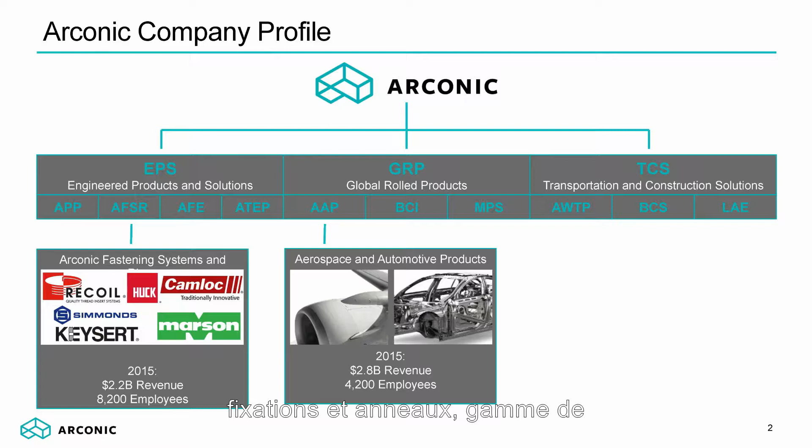So sheet metal, fasteners, and engineered solutions. The two groups that will probably interest this group the most are Arconic fastening systems and rings, and rolled products. Fastening systems and rings offers a full series of structural blind fasteners, lock bolts, threaded inserts, and similar products. Our rolled products group, which I'll introduce today, supplies sheet metal to automotive customers as well as aerospace customers.

As far as automotive is concerned, our automotive support and presence includes sales, manufacturing, and support locations all around the globe. I'm from our North American group, and I sit at a desk in Waco, Texas, at one of our manufacturing plants. We also have a large technical development facility in Pittsburgh, Pennsylvania, where some of this technology was developed, as well as a location here in Telford locally.

The technology I'm going to introduce is really best described as a hybrid of welding and mechanical fastening. It was developed through collaboration between our technical center in Pittsburgh, which has a lot of mixed material welding, joining, and aluminum development experience, and my group headquartered in Waco, Texas, which has a lot of experience in mechanical fastening and joining. So this new technology brings together the best of both schools of thought.

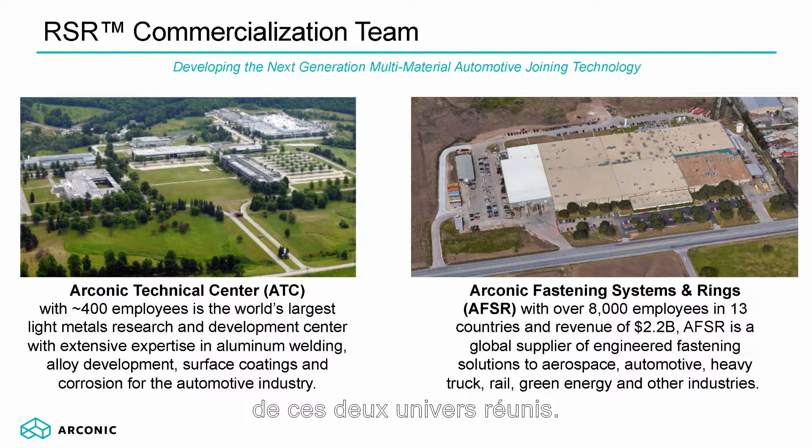The mixed material approach would be more like what you're seeing in the Cadillac CT6, where you're very selective about using high-strength steel, maybe in your safety cage, but more comfortable going with aluminum in your closures and outer panels. We feel our technology is well situated to help you along either of those paths you choose to take.

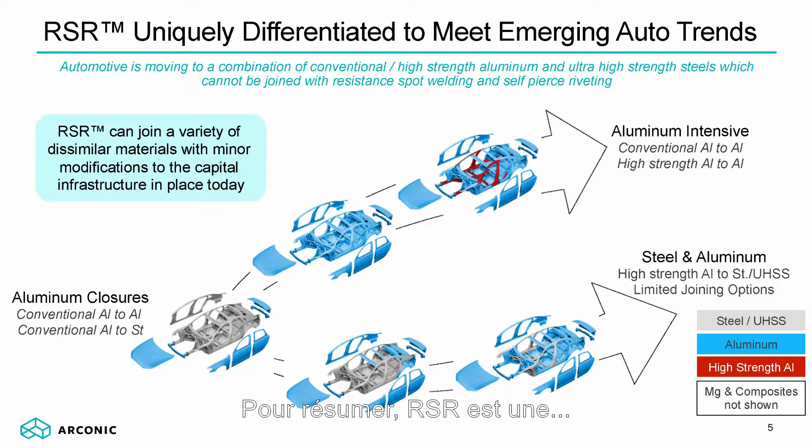So with this technology, you're not actually welding the top sheet to the bottom sheet. You're welding the fastener to the bottom sheet and capturing the top sheet, but you still get a nice rigid joint. That allows you to join a large variety of materials as your top sheet.

Obviously your bottom sheet needs to be metallic, so either steel or aluminum, and you choose the fastener to match that bottom sheet. But then you can join either metallic or non-metallic sheets to that bottom sheet—painted or unpainted steel or aluminum, plastic, just about anything you can imagine. The large majority of our development so far has been mixed material, aluminum to steel, and the reverse.

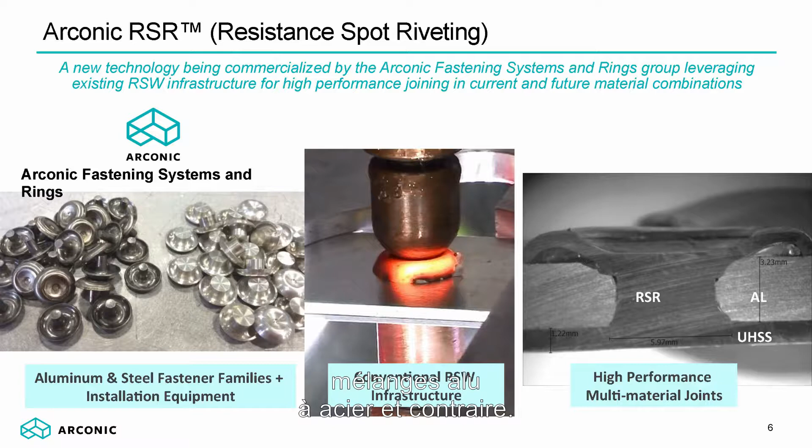I've got a couple of videos, since words only go so far to describe what you're seeing with this process.

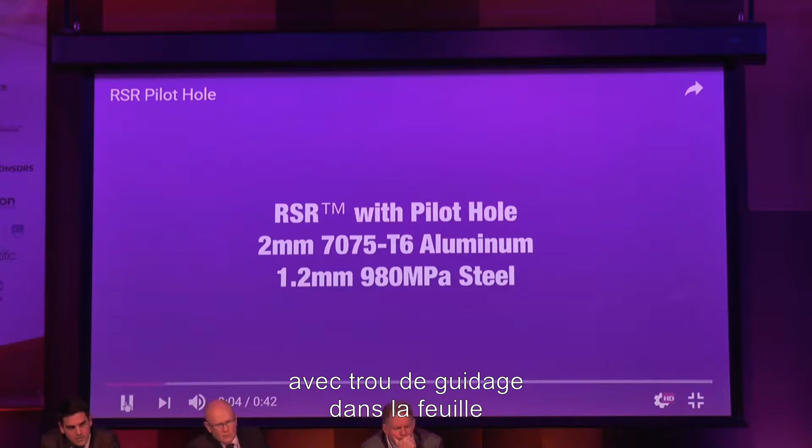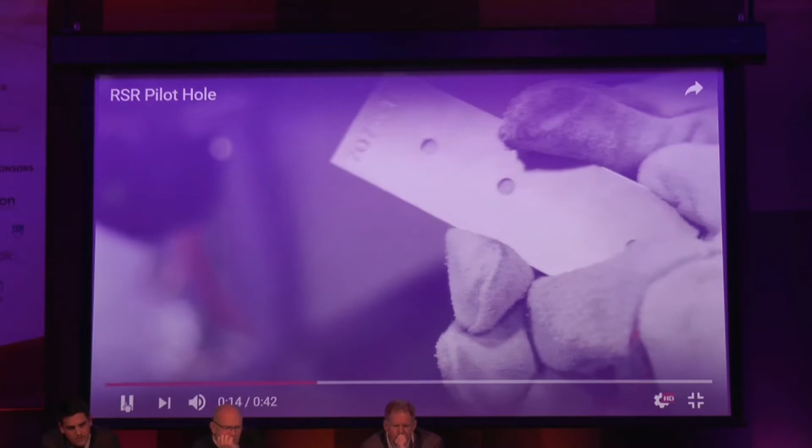There are two ways that this works. This is the first, where you have a pilot hole in the top sheet and the rivet passes through it. So in this case, that's the pre-prepared top sheet, those are the fasteners themselves, and there's our feed system with a top hole. That's all the time the process takes—it's very comparable in cycle time to your weld cell.

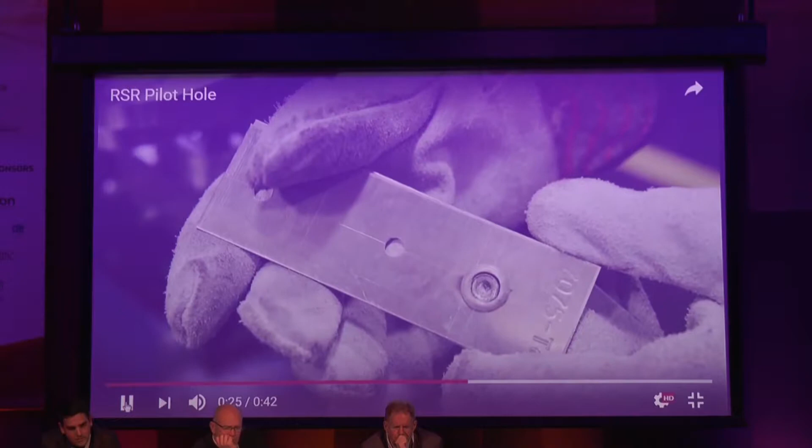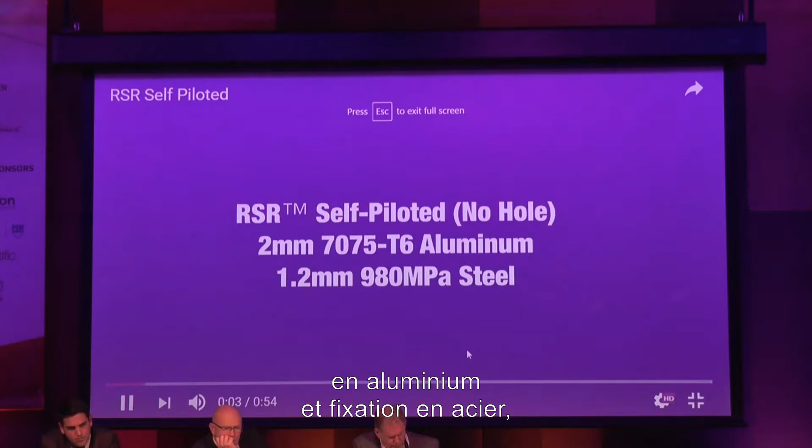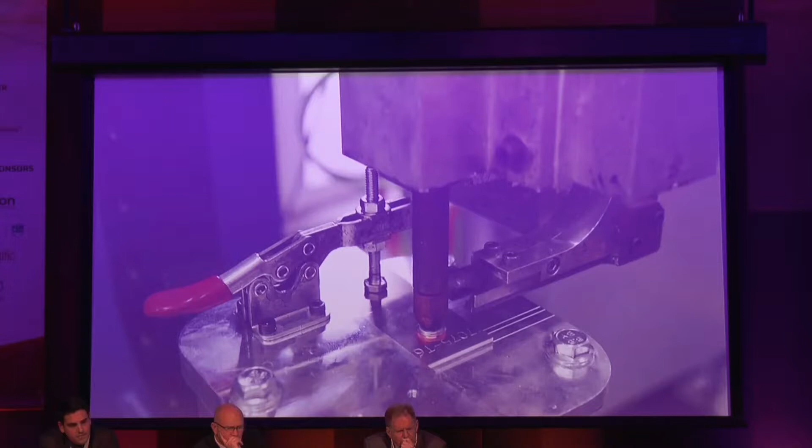Then there's a second video that shows that if aluminum is your top sheet with a steel fastener, you would not have to have a pre-pierced hole in the aluminum sheet. The steel fastener can heat up the sheet and force its way through. We'll see it's a slightly slower cycle, but similar whether you have the pilot hole or not—you still get some moderate results.